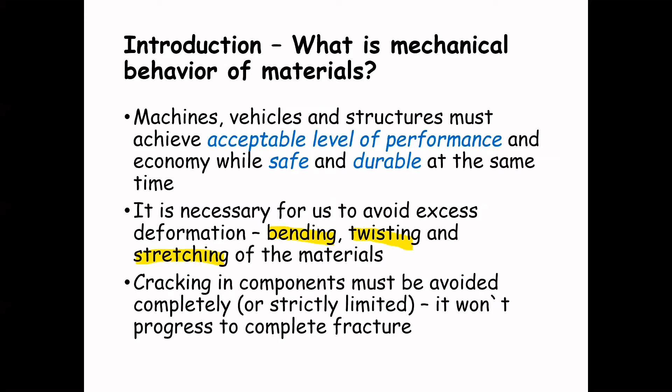So why are mechanical properties important? Material testing is often the last step in the manufacturing process, and yet the quality is the result of both the process and the material. If the material that goes into the product is defective, then the product may be defective. So in the process of forming materials, understanding the material's properties can help to better predict the manufacturing outcome.

And for manufacturers, it is very important to understand the mechanical properties of materials that exhibit some Hookean behavior during loading. It is important because the performance of a structure is frequently determined by the amount of deformation permitted, and some measured properties that must be considered when designing a structure include tensile strength, yield strength, and Young's modulus of elasticity.

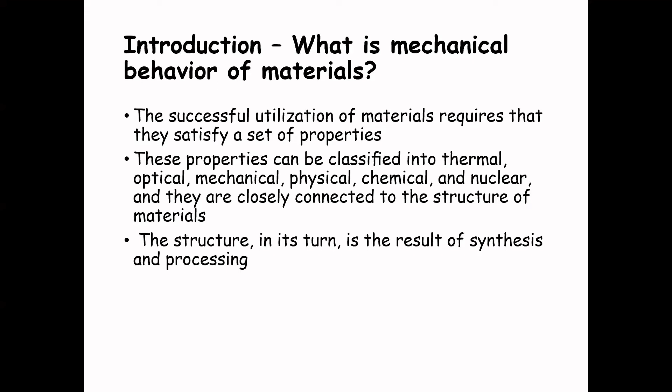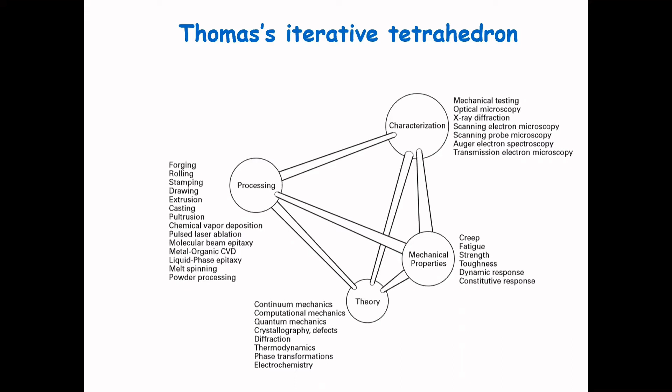A Thomas iterative tetrahedron is a schematic framework that explains the complex relationship in the field of mechanical behavior of materials. The successful utilization or application of a material requires that they satisfy a set of properties, and these properties can be classified into thermal, optical, mechanical, physical, and nuclear, and they are closely connected to the structure of materials. And the final structure is the result of synthesis and processing.

So a schematic framework that explains the complex relationship in the field of the mechanical behavior of materials is what we call a Thomas iterative tetrahedron, which contains four principal elements, like what we can see in the figure here. We have mechanical properties. We have characterization. We have theory, and we have processing. And these elements are related, and change in one will affect the changes in others.

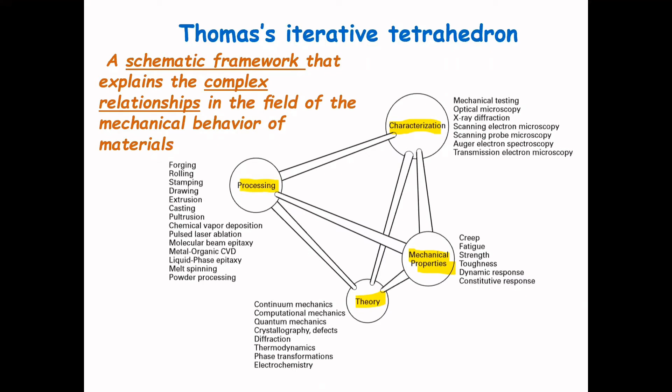And so we have an example of Thomas iterative tetrahedron in the automotive industry: the application of the tetrahedron of material science and engineering to produce sheet steels for automotive chassis. And we can see here that the composition, the microstructure, and the synthesis and processing are all interconnected, and in the end will affect the performance to cost ratio.

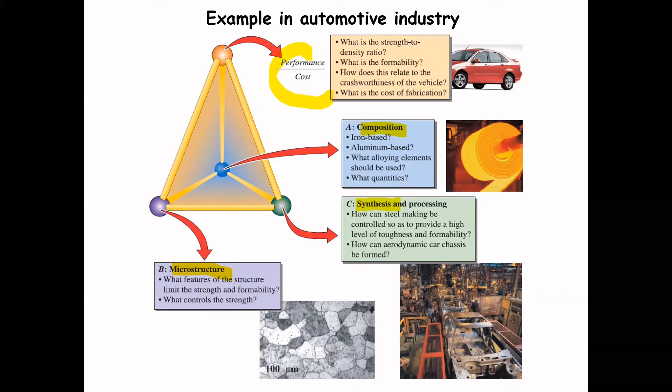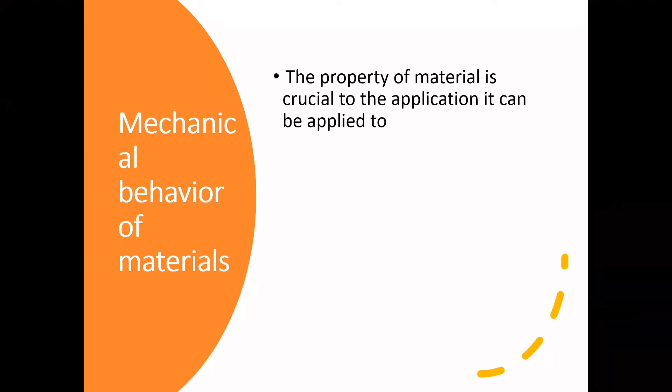The property of a material is crucial to the application it can be applied to, and it is very important and necessary for the design, specification, deformation and failure estimation, microstructure property relation, selection of the material, and also in terms of economic consideration.

Matter is anything that has mass and occupies space. And a useful way to start thinking about matter is to think about the different materials or substances that it can be made into. And these materials make up the objects about us, and each of these materials has different properties or characteristics that can be observed or tested. Scientists, technologists, and engineers investigate these materials. They experiment with them, compare their properties, and relate the results to possible uses.

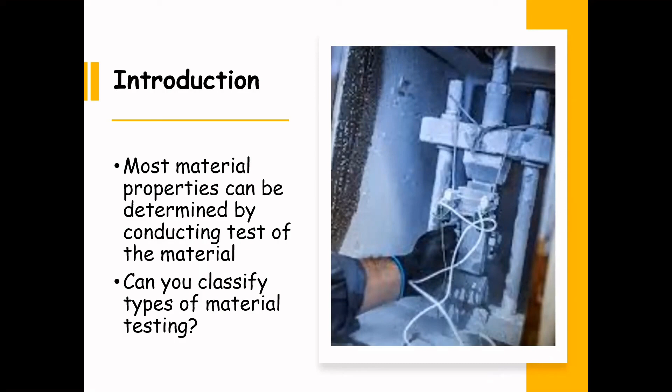So now we will talk about testing of materials to determine its mechanical properties. Here is how we can classify material testing. First, we can classify materials testing based on destructive and non-destructive testing. So in destructive testing, the specimen is damaged beyond use. For example, bending testing, tensile testing, and impact testing are some examples of destructive testing.

Non-destructive testing, on the other hand, is where the material is not damaged or harmed. For example, if you want to determine the structural integrity of a pipeline, NDT is the most suitable way for that purpose. And here we have some examples of NDT testing. We have ultrasonic testing, eddy current, radiographic testing, and magnetic particle testing.

And also we can classify testing of materials based on scientific testing and commercial testing. In scientific testing, there is more careful and precise measurement of a property with the aim to supply accurate data for research and design. And on the other hand, we have commercial testing with the purpose to check if the materials meet the specification to establish a degree of quality control.

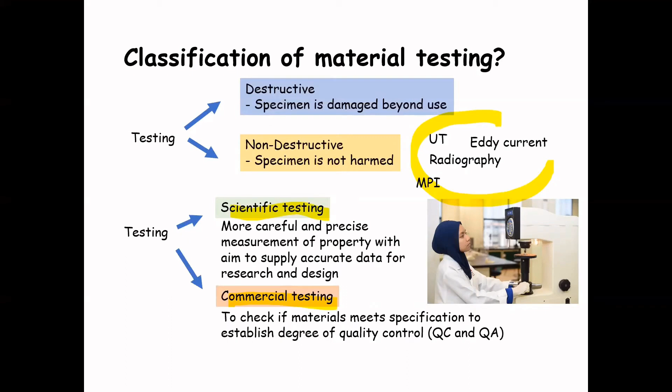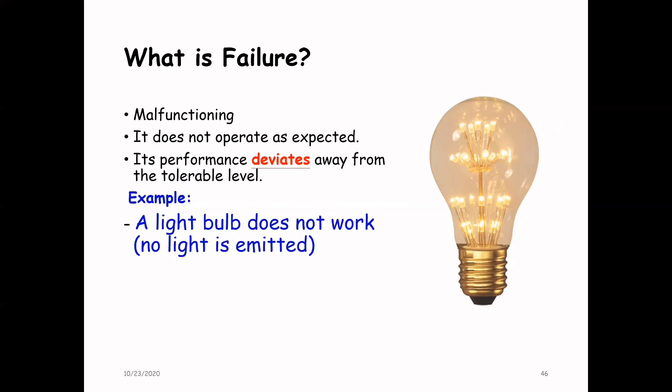We don't want engineering materials to fail because they can cause loss of life, economic loss, or a loss of a product or services. The usual causes of material failure are incorrect material selection, incorrect processing, incorrect manufacturing procedure, or inadequate design.

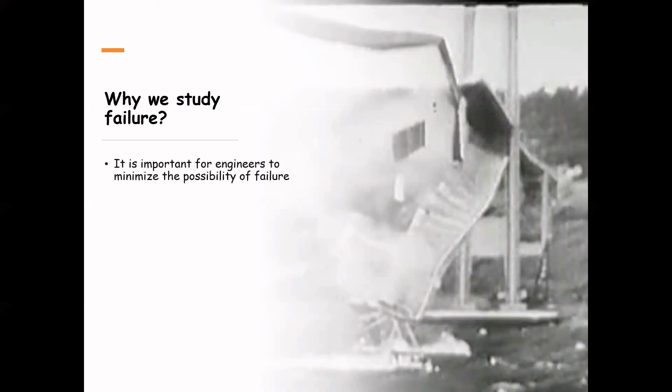Failure is defined as any change in size, shape, or material properties of a structure, a machine, or machine parts. Or in other words, a part becomes unable to satisfactorily perform its intended function. It is important to understand the mechanics of various failure modes.

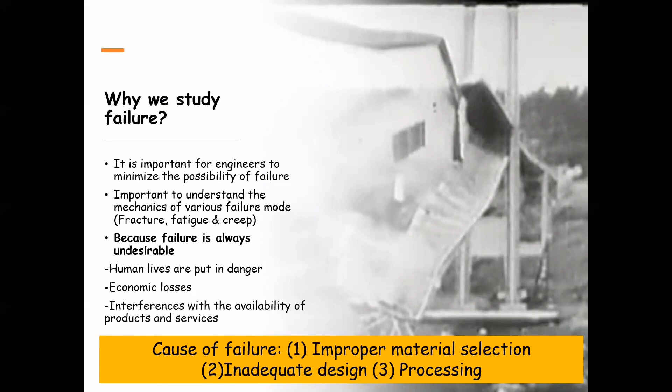Failure is always undesirable because it will put human lives in danger, it will cause economic losses, and will interfere with the availability of a product and services. And commonly, the causes of failure are improper material selection, inadequate design, and also processing.

So first, maybe it is important for us to define what is a fracture. We can define a fracture as a separation of a body into two or more pieces in response to applied stress at a temperature that is relatively low to the melting temperature of the material. So how does fracture occur?

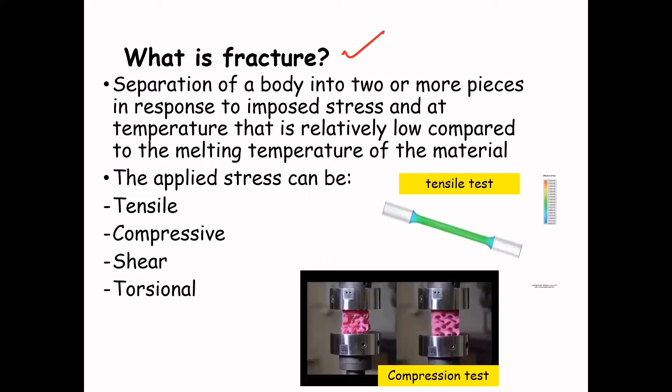So deformation can be divided into two. That is a time independent, such as elastic and plastic, and also a time dependent, such as creep.

Fracture, on the other hand, can be due to static loading, that is either brittle or ductile, due to environmental and creep rupture. And in addition to that, fracture can also be due to fatigue or cyclic loading, that is either high or low cycle, and crack growth can occur during fatigue.

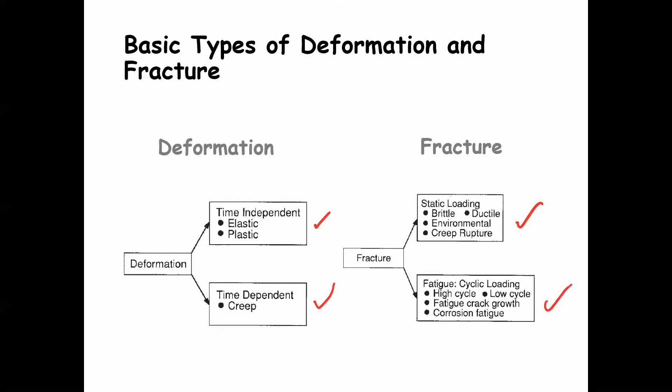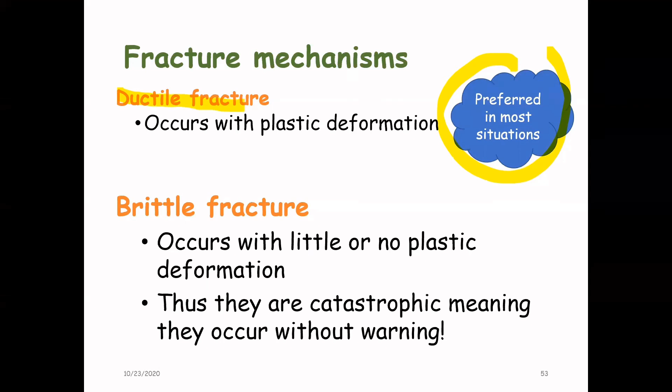So now I want to talk about ductile and brittle fracture. So we have a ductile fracture that can be defined as a fracture that occurs with plastic deformation, and this is the most preferred in most situations. And then we have a brittle fracture that happens with little or no plastic deformation, and thus they are catastrophic, meaning that they can occur without warning.

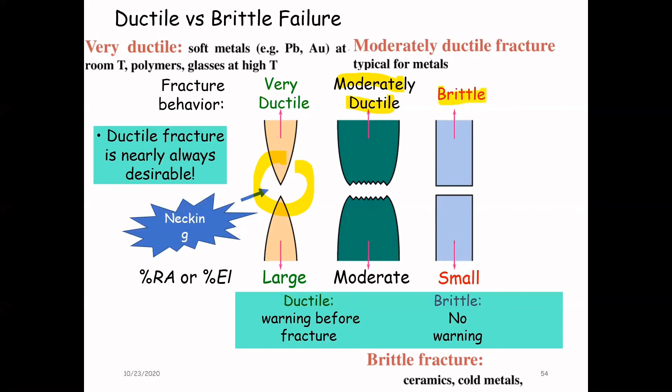And this is how we can show the fracture behavior of a very ductile, moderately ductile and a brittle material. And so we can see here for a very ductile material, the specimen necks down to a point here in the middle. And here we have a failure for a moderately ductile material. And then we have a brittle material here, where we can see that deformation is very small and fracture occurs without warning.

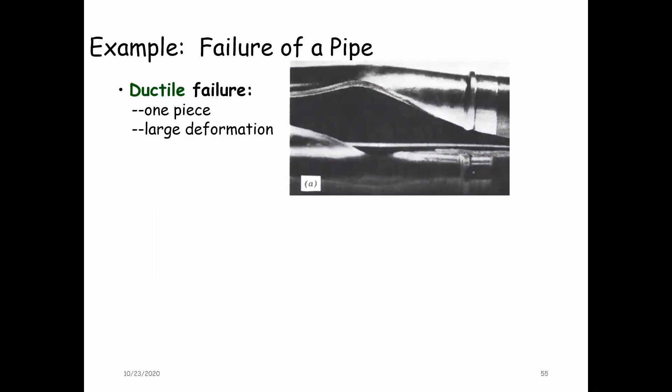And here we have an example of a failure of a pipe. We have a ductile failure, and like what we can see in the figure here, the pipe is still in one piece, and we can see a very large deformation happen. And then we have a brittle failure where the pipe broke into many pieces, and we have a small deformation that happened. And we can see that the specimen shatters into many pieces during the failure.